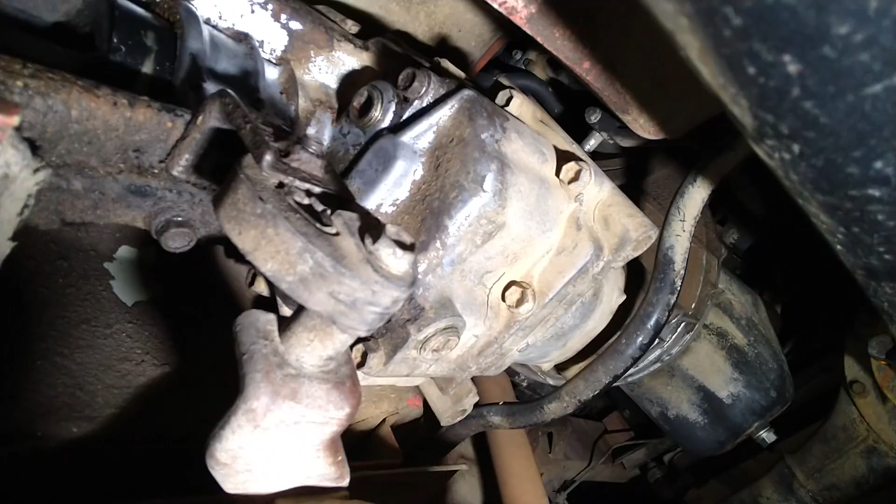But first, let's try to crack open the fill plug, as always. Our transmission has a level plug here, the fill plug here, and the drain plug here. On this transmission they're all conical. Luckily, we have 3 of those extra, which means we won't have enough for the transfer case, but we'll order some. We are going to totally ignore this one, because we are going to overfill it a bit and see what happens.

But first, let's try cracking this open and this open. I have a feeling this is going to be the hard one, because I see oil here seeping out, so maybe the threads are okay, maybe. And I think this one is glued on with something green.

Last time we just used a 3/8 extension to turn the plugs. In the meantime, I actually got a 10mm adapter. It fits a little bit nicer. So let's try to crack those open. We're not going to film that because I cannot hold the camera and film it at the same time, so you'll have to trust me if I do it or not.

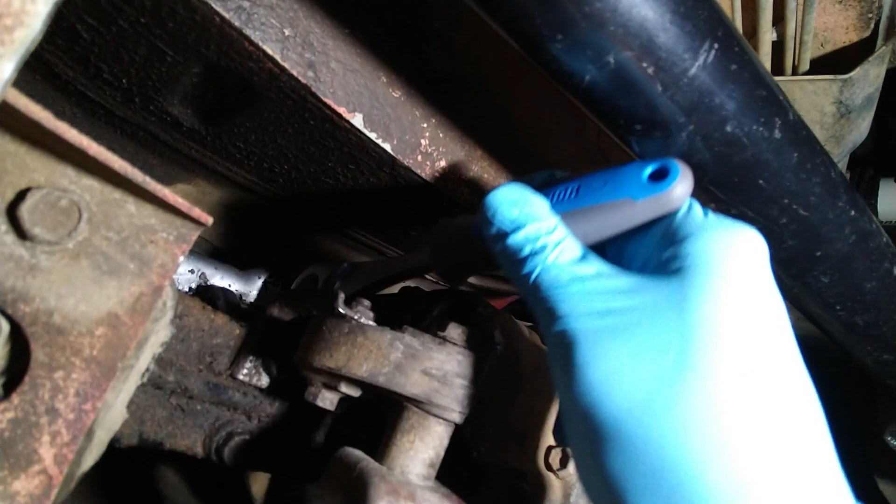Okay, so the fill plug is undone - I mean, it's not out, it's just loosened. I'm going to loosen it more. Oh, this is really small. You need to have a real nice ratchet to do this. See how much? 2 clicks. I have 2 clicks of room here. And this one is also coming out nicely.

Now we are going to disassemble the shifter in the car and see how that looks like, and then we are going to drain it. We actually do not need to take this plug out because we are going to fill it from the inside of the car, but we'll see how it goes. The bucket is fairly clean because we want to examine the oil when we get it. And did I find another hole in the car? Maybe. Okay, so fairly clean bucket.

Let's see - I think you can get this on camera actually. And try not to get it too much on the catalytic converter because it is going to smoke a lot. Ready? Ready?

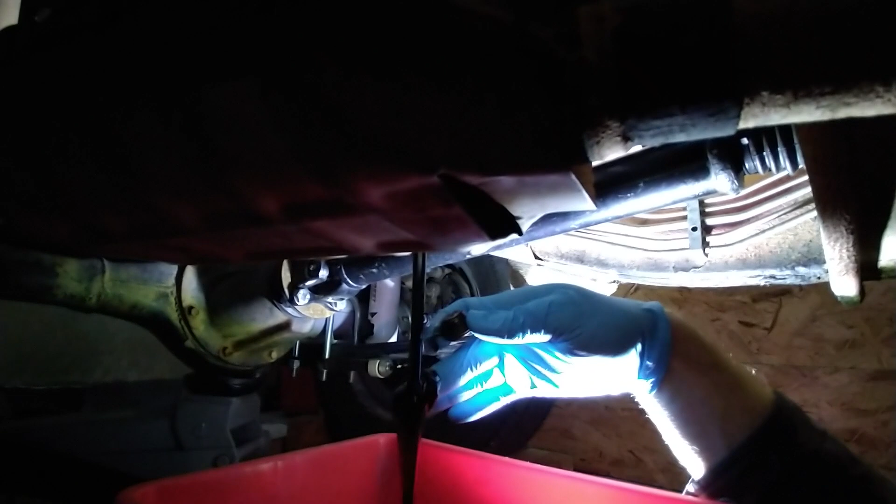Wow, oh, that is very black. Greenish. What? Greenish. We have some metal shavings on this, I think. Okay, let that drain. Oh, it stinks. Yeah, it is gear oil, you forgot about that.

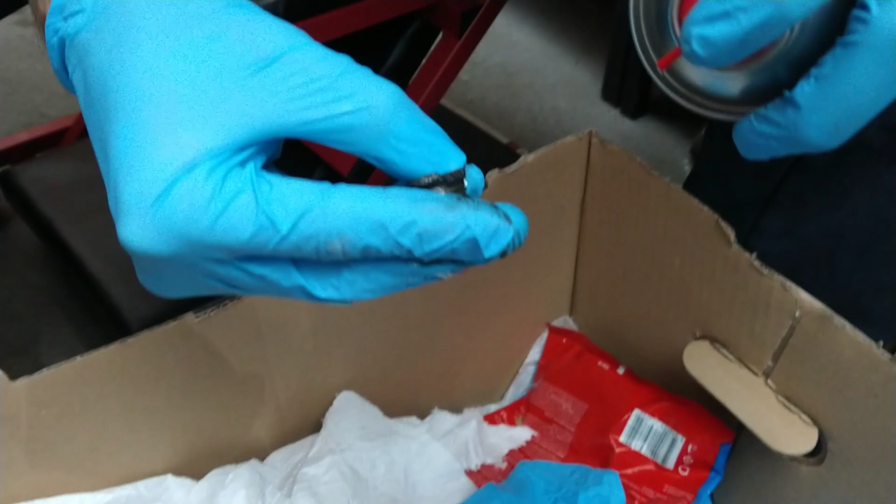Let's let that drain and let's examine the plug. It seems that this plug has a magnet. And there is - really? Yeah, and there's some sludge here. It's magnetic sludge and some metal shavings.

Let's see. Do you see the silver parts? Wait, do you see them? Be still. There's a big chunk here. Where? On the top of my finger. Here? Oh, yeah. Do you see them? Yeah. So there are some metal shavings on it. Metal shavings, yeah. And there is some - I don't know if it's sludge or just - they're quite small, and I have no idea how much is too much for this transmission. Look at that.

Interesting - yeah, but there are no humongous parts, just small metal shavings. You're saying this is normal? A bit is normal. I don't know when this was changed - it may have been many tens of thousands of kilometers. That would explain the amount here. So we're not going to bash our heads about it, we're just going to do a light service and see when it blows up.

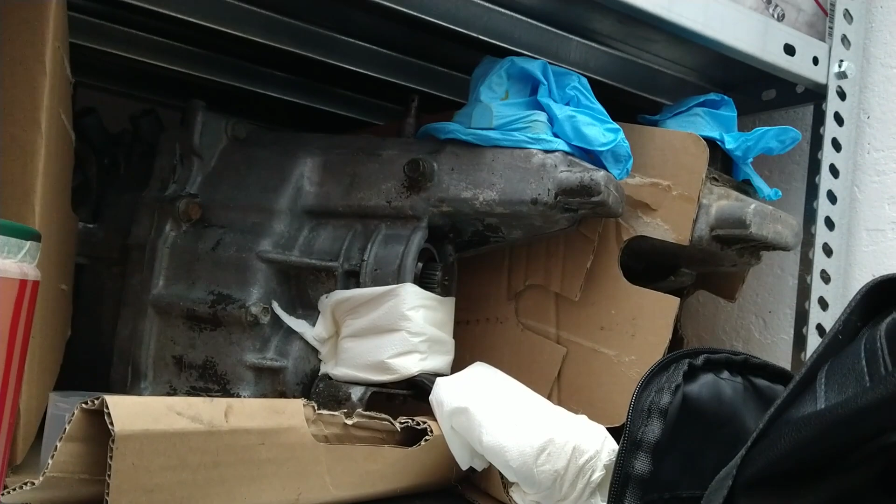Because we have 1, 2, and 4 more spares.

Yeah, there's a lot of metal shavings here now. How will we clean it? No, we're just going to put a new plug in.

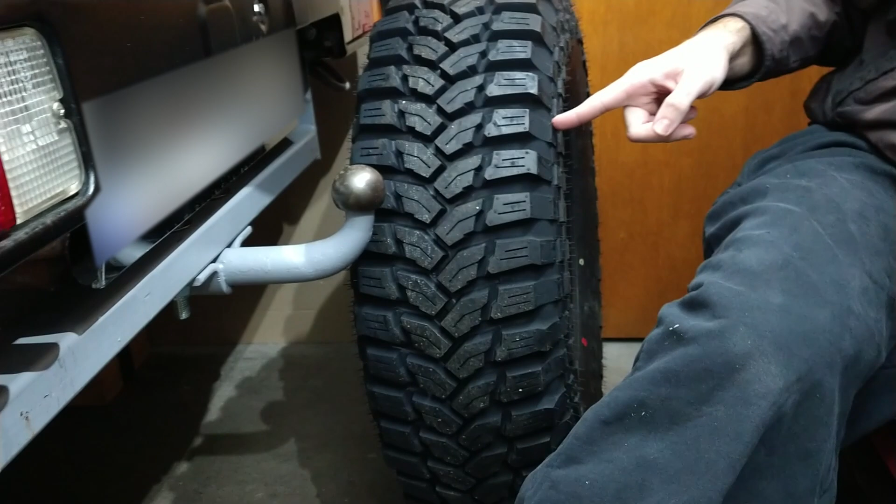You can wipe this off with a rag. I'm just trying to expose them so you can see them on camera better. I think one of the bearings inside is going, or it's already gone, so we need to build a transmission and put it in. But since we made some ill-advised decisions, we're just going to service this one and then concentrate on building a crawler transfer case and start from there.

Let's take the boot out of the car and take the shifter out to see how that looks. I would say turn off the dome light, but it's so weak, and I need somewhere to put this so you can see what I'm doing. Yeah, we have a shadow there, but you will forgive us.

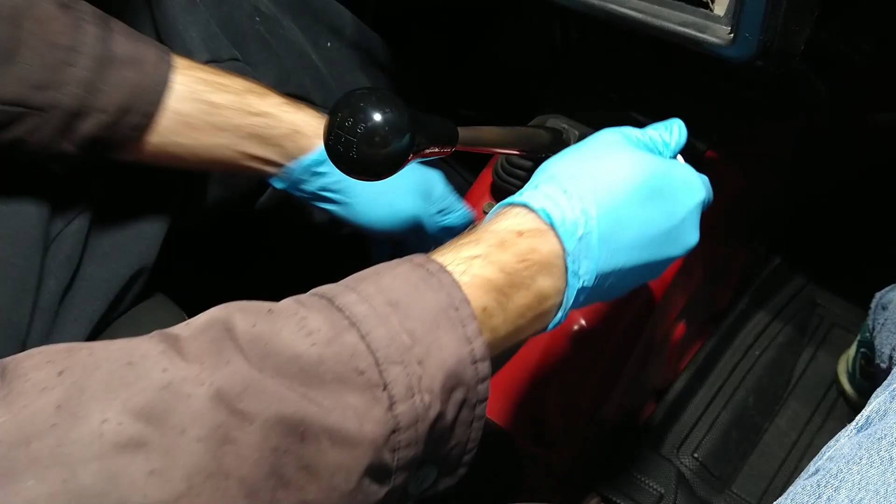Let's see if we have to. Maybe we should do this properly. I've never seen this open before. So we'll take the shift knob off.

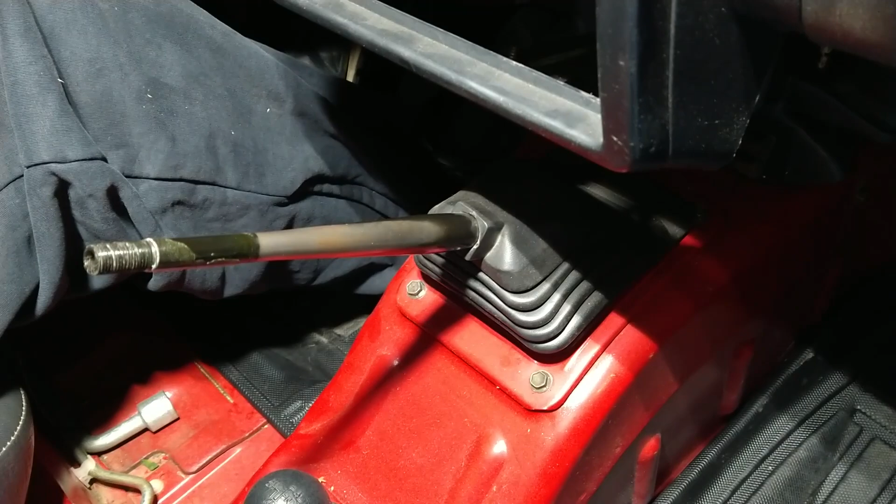Just like that, we have four 10mm screws that hold the boot down.

I never took one of these apart, so this is probably going to be quite nasty from the other side. Nasty, yeah, greasy.

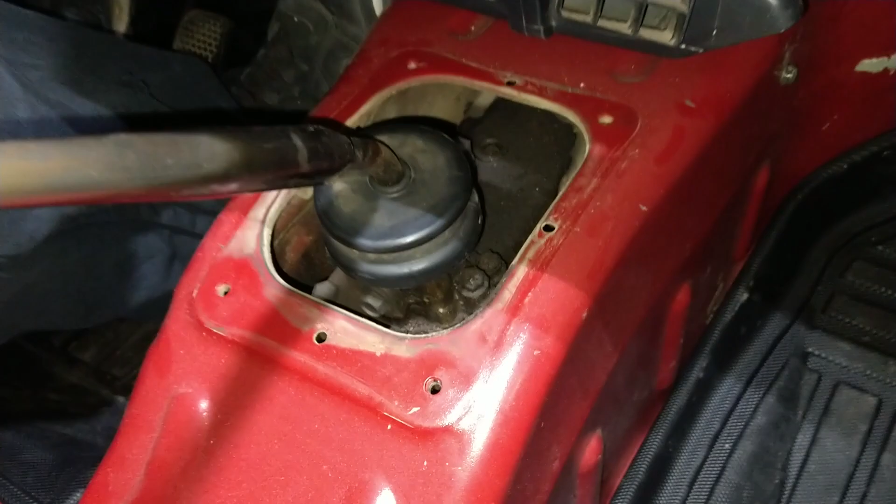Can I pull this now? Oh, it goes somewhat easily. It's not that greasy. Just dusty. Dusty is okay, you want dusty. You do not want greasy.

Let's see, oh, this fell off. This is another boot, yes, that fell off. There is some play in this.

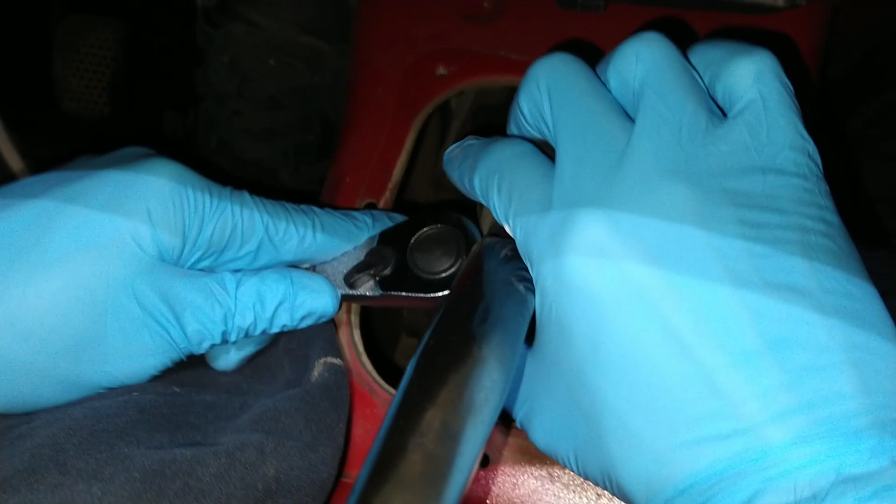Before we take the shifter out, make sure that it is in neutral, so you don't have a problem putting it back in. Because if it's not in neutral, you probably need to push a flathead screwdriver in and try to get the forks to the neutral position.

Okay, this boot is also not looking that bad, but it was not installed properly, and now we're starting to get some grease on everything.

Do you think we will feel the difference when driving, when we change the oil? I think we are. And now this should just pop out like that. Oh, this pin is not that bad.

What is this for? See this slot here? This slot meshes up with this pin here, and that is what keeps your shifter from rotating.

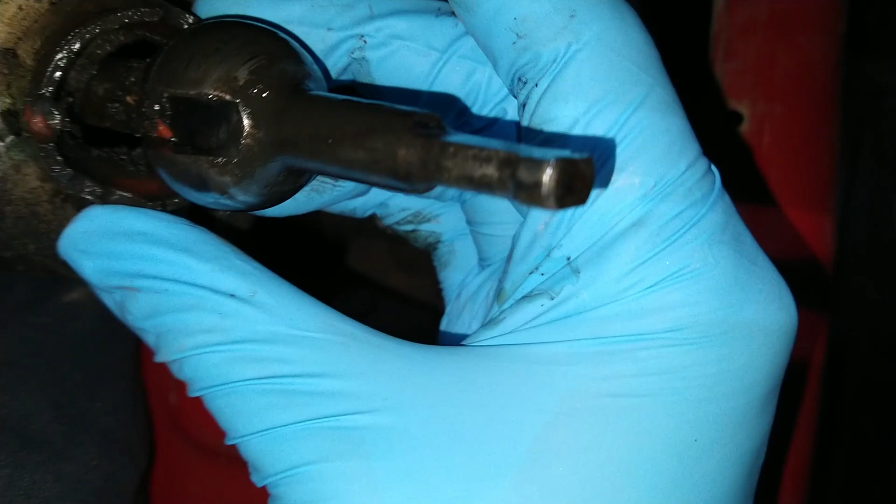The springs are springy. We are going to clean all of this out. It has seen better days, this bushing.

Will we just dip it in something? We are going to exchange it, yes. So let's get out of the car and clean all the parts before we pour oil from here.

Just let me see inside. Oh, I can see the gasket material. Yeah, it's a kind of silicone. Maybe this was off at some point of its life.

But yeah, this pin breaks here, and then you have a sloppy shifter. And you need to take out this bolt. This is one bolt, and there are two sizes, M8 and M10.

Depending on the year. Yes, I think after some year they put a bigger bolt because they're prone to breaking.

And when you're doing this, get on the light. You inspect this part, see how these walls are nice and parallel. If they're oval, you will also get a sloppy shifter, and at that point you need to exchange the whole shifter.

But most of the time this bolt breaks, and then you get a sloppy shifter. All of our other Samurais have a sloppy shifter, and it's because of that it is broken.

Is this a crack here? This has seen better days, this has split. What about that? We have a new one.

Let's locate it, let's clean everything, and let's start assembling everything back together.

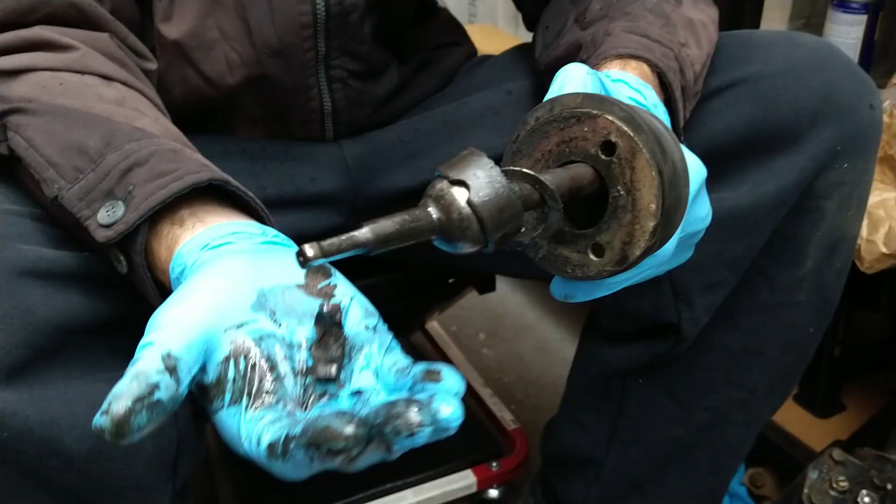And just like that, we have removed the bushing. Oh, great. So this is all not that bad.

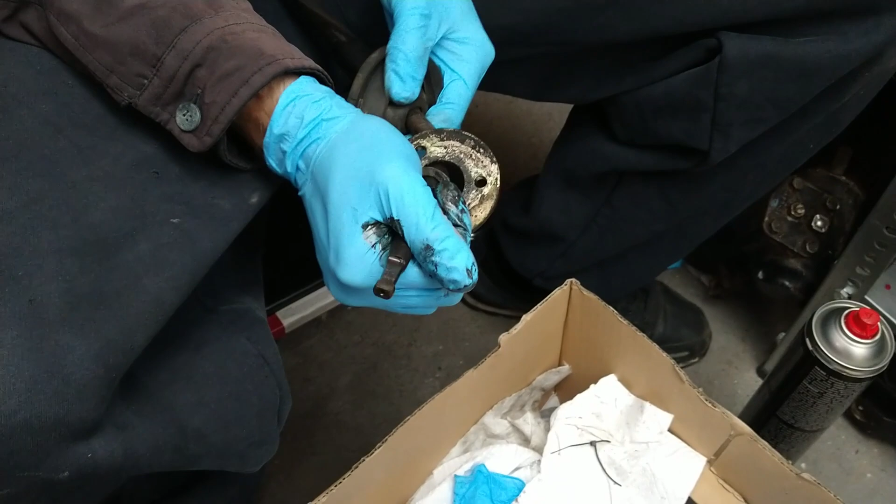I don't know from which side you need to put this boot on, but let's try to invert it so it's out of the way. Yeah, that will do. Oh, parts are falling off. Let's see now.

We have a bushing here that is brand new, but it needs to go from this side, so this boot needs to come off. We have a new boot and a new plate.

Yeah, we should open this. The new metal cover, this is that part. This is the new bushing.

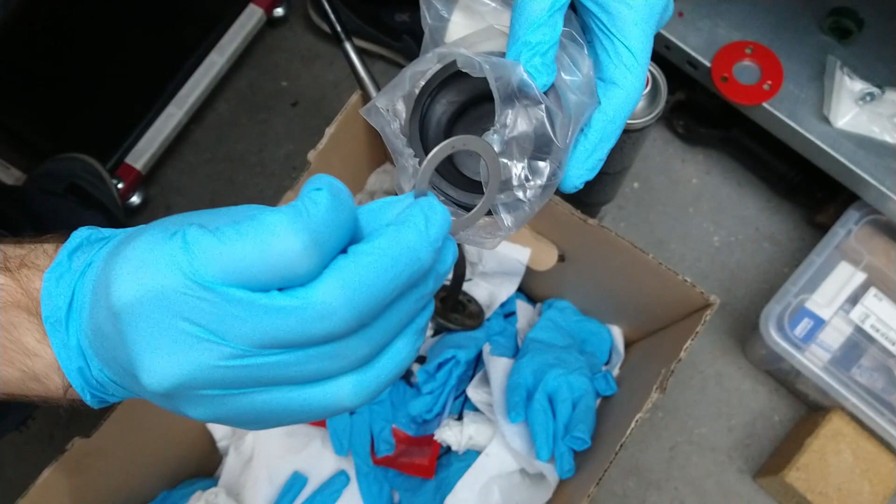That just fell apart. It's not really round, but maybe it's an optical illusion. Yeah, it's not round. And a new spring for that. It's not a spring, it's straight. This washer should be a spring washer, and a new boot.

This is a new boot. Looks a bit different. It is the same thing. Okay, so I need to remove this one. Yes.

Use silicone spray on this, but the silicone spray is at the workshop. Oh come on, how do you get it off? I want something soapy. Actually, we do have something soapy. There we go.

Get one side on and then rotate it. There we go. Assembly should be much easier. So we're going to reuse that part.

Oh, you know why it looked different? This one is stretched a bit. And see this washer, how it's springy? Maybe it's just squeezed.

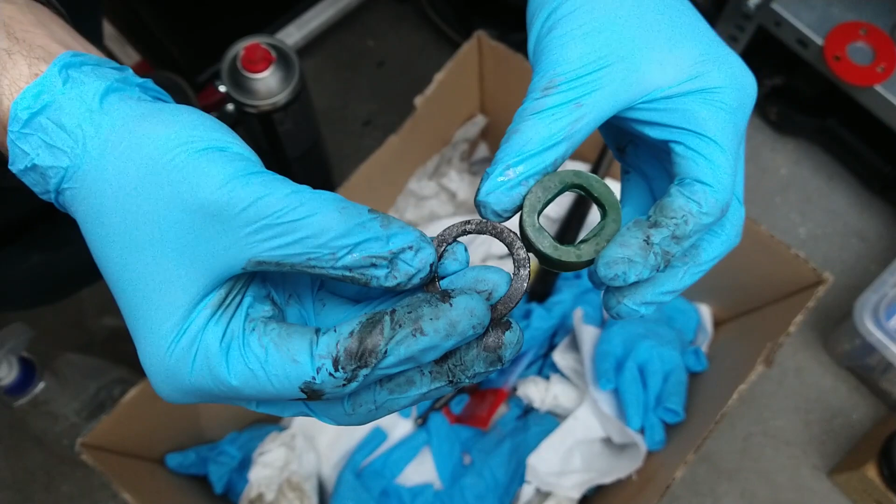No, this is how it's supposed to look. But will this other one get this shape? No, it needs to be like this before installation. So when you tighten it, it pushes on the bushing. That's why it is this shape. I'm not sure why they do not include one in the kit.

Can we shape it like that? Yeah, but I don't know if this is made from spring steel. That is the question.

So we are going to use the original one after we clean everything. We're not going to exchange the shift ball because that one is intact and I cannot feel any wear on it.

So we're going to reuse this part. Oh, look how shiny. Yeah, imagine if you give some love to your parts, they work better most of the time.

Oh, we need to get some grease. We need to grease up the top of the transmission after we put oil in. It says to put 1.3 liters in, but if you put a little bit more, I think nothing bad is going to happen.

And we can operate it for extended periods on extreme angles, as we plan to do. And the gear whine should be a little bit smaller.

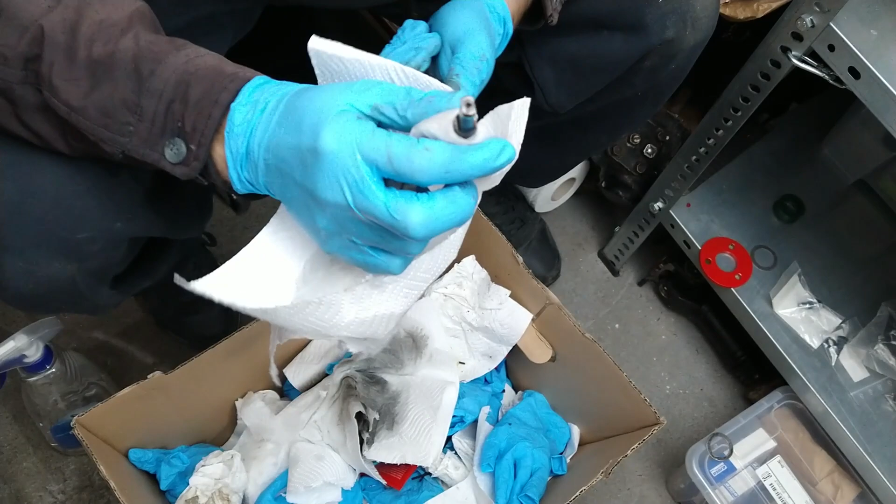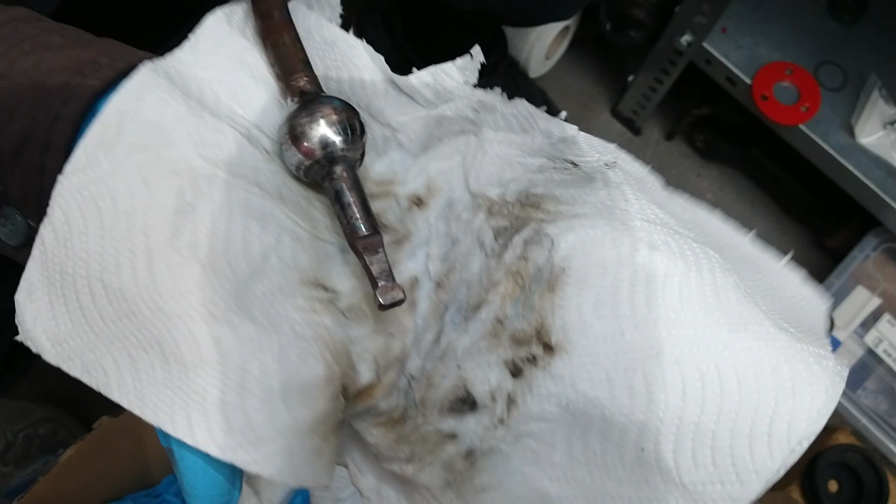Let's inspect this now. You see a wear patch here? It's not that deep, it's just shiny. There's a wear here. Everything looks very straight, nothing's broken, nothing's worn too much. It had sufficient lubrication, apparently.

So let's just clean it all up. This is interesting, look at this design. Let's talk about the design. This is the middle point.

But this thing I think is hollow and it's made from two parts. And then this part is slipped on and it's pressed. So I think this part goes to about here and then a hollow shaft. Is it hollow? Let's test our theory. Yeah, it's definitely hollow.

Okay, then the hollow bar is pressed on to keep it in place.

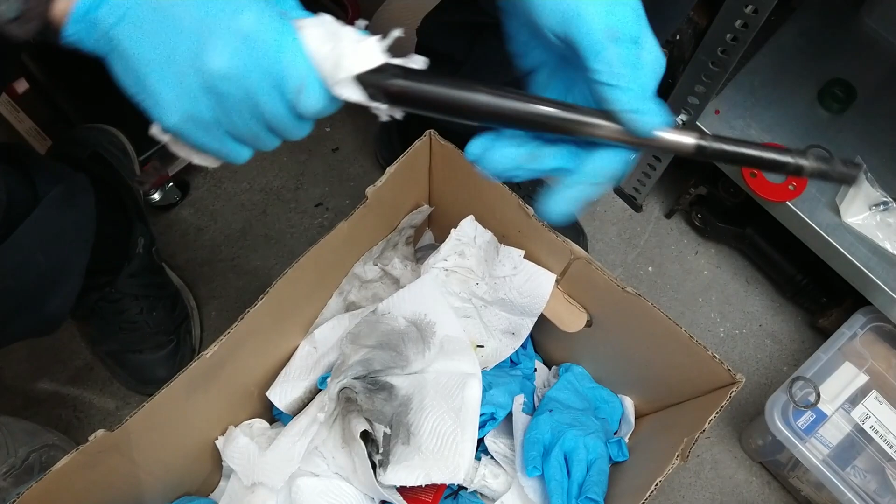Very interesting design. Why is it in a different color? It's faded, it looks faded. So the color is still a bit here. Then we have, yeah, it is faded from the holding on to it.

So this is anodized and this is paint here. And the paint is chipping off. And the anodization, this is literally years of wear from somebody holding their hand like this. Yes, and grabbing it like here. Yeah, but let's clean everything.

We need to get some grease. Let me just think what grease should we put in there. Green grease? No, I was thinking that black one. Ooh, the shiny one. Yeah, the shiny one, the one that you like the most. But before that, let's pronounce this clean.

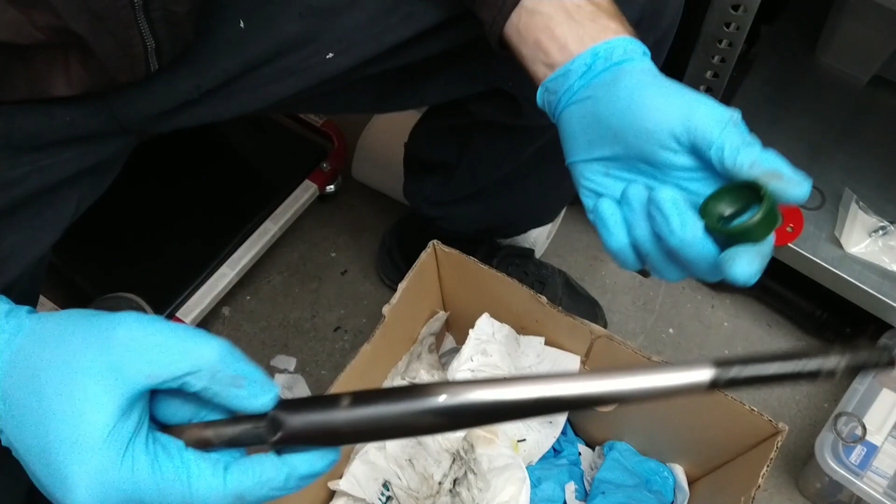And now, the new bushing? Seriously, I need to press it on. How do you put it on? What material is this, plastic? Yeah, this is some kind of plastic.

But do you really need to squeeze it all the way here? No way, this is gonna break again. It's probably gonna break. I cannot put it here. No, I think you are supposed to... break it. Yeah, let's try a little bit of lubrication.

Oh, it doesn't like that. Oh, you did it. Yes, you see?

Okay, so the spring washer, that goes on top. Where is our plate? That one, we should not throw that in the garbage.

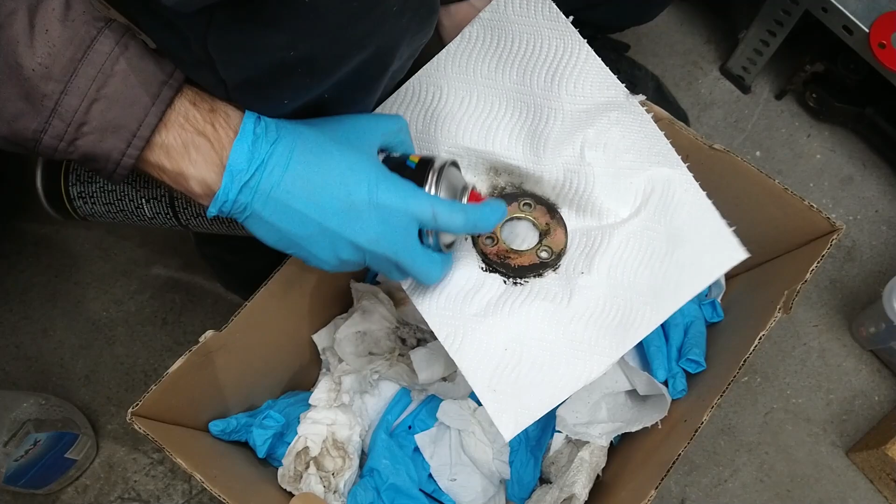We are going to use the original. What about the new one? We are just going to put it in the pile of new parts. Look how nice and red it is. Yeah, but this one is anodized, so it didn't rust. See, that one is probably just painted. Yeah, but look how nice it is. I know it's nice, but this one is the original one.

And we can exchange the bolts, those are M6 by something bolts. So I need to go get the grease, some bolts and some washers.

Do we have oil here? Yes, this is full. 75W80, good enough. This is going in.

Just like that. That one goes here, the boot. We're going to use the original boot, yes, original again. So we have some spare parts.

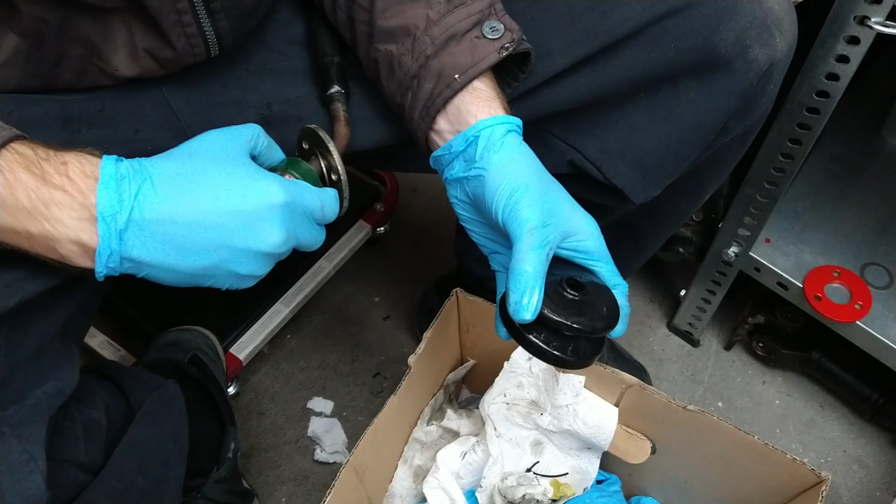We just needed this green part. And today I learned that you can get it from brass. Oh really? Which would have been nice if I knew that. And you can get just this part? Yeah, you can get just that part.

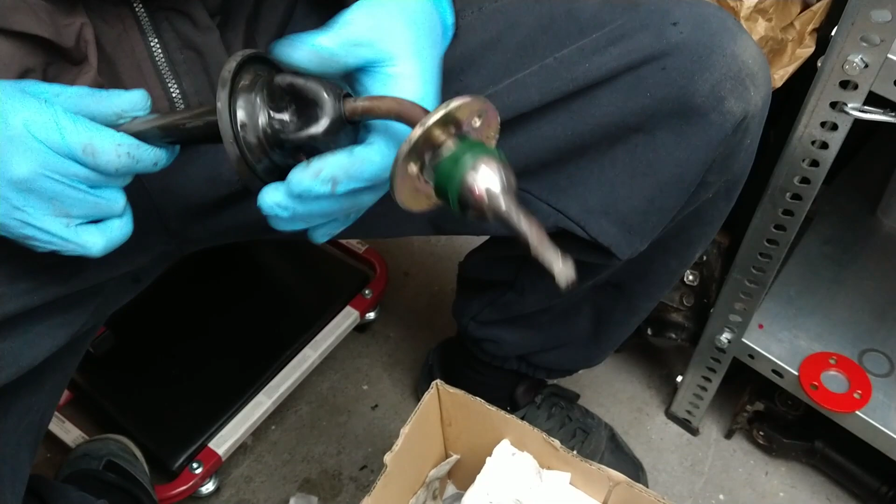The boot is on. Let's invert it so it's out of the way. Just like that. Grease, put a lot of grease, and these are the bolts that we were talking about.

So this is an M8 and this is an M10 one. I think this one uses the newer style, like this. Oh, you got both. Yes, I got both because I did not know which one to get, and they're quite cheap, so I got both.

And we have a spare boot in the end, a spare pressure plate, let's call it like that. What about the big boot? We have a new one, but since that one is not cracked and it's just dusty, we're just going to use the old boot. I'll clean it a bit.

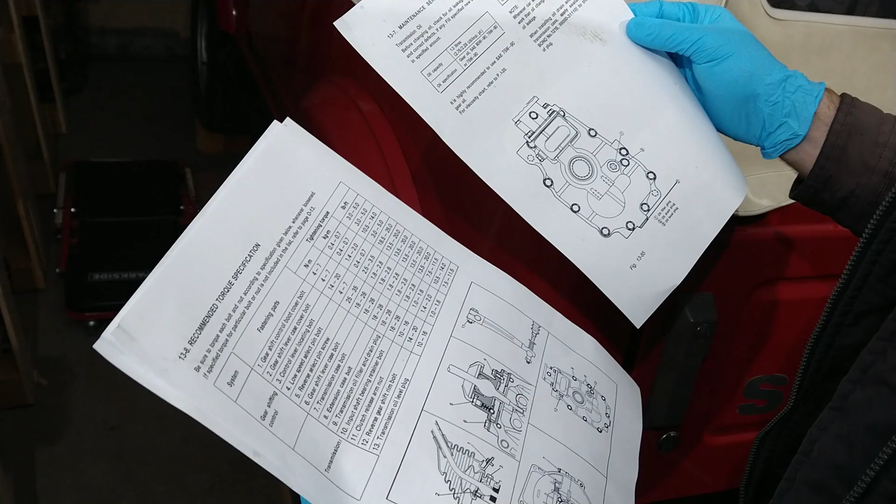10 to 16 Newton meters. Transmission, 10 to 16 Newton meters. We're not going to exchange the level plug. We're just going to tighten it back on, and we're going to put a new drain plug and see if it leaks. If it leaks, we'll put some Teflon on it or something like that, and we'll do a new transmission oil change ahead of schedule.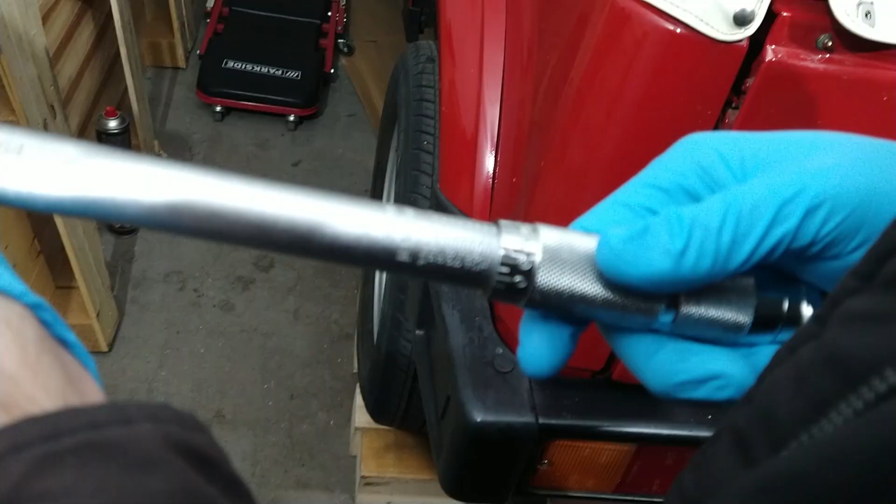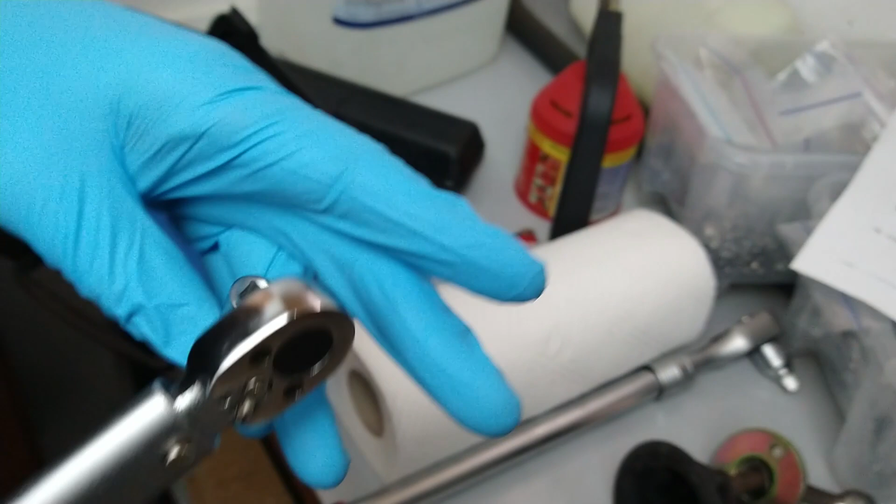Oh, looks the same. Look how cute it is! But it's smaller. And I have this, the cutest adapter. Oh, it has it even, this is small. So the minimum here is 2, and maximum 24.

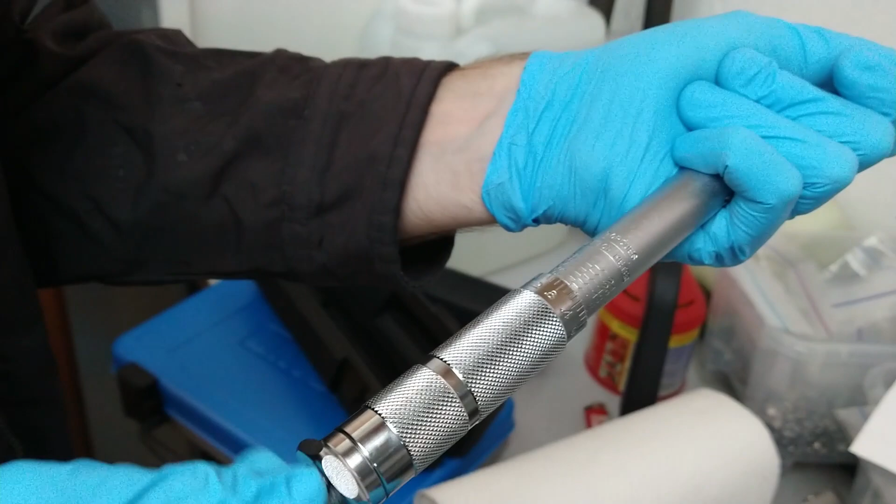And on the other one? I don't know. Oh, that is 5 to 80, I think, something like that. Okay, so this is 4. Oh, I have a long way to go. This is 10, let's say 12, or... Yeah, 12. It says 10 to 16. Let's put it on 12.

Let's tighten the smallest knob. Okay, now first of all, tighten the drain plug back up. It's still dripping down here.

Give me an extension. Where is it? I have no idea. Great. Is it on the table? No. Are you sure? Found it.

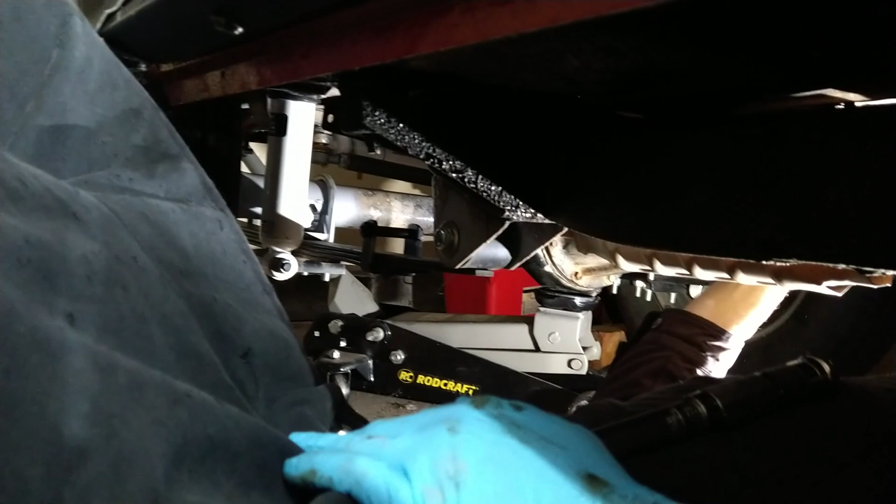This new plug also has a magnet. And it has some Loctite or something on it already. Yeah, it has some thread locker on it.

Oh no way. We are going to 16. Oh really? Yeah, the thread locker is messing with our engagement. Where is 16? Here it is.

Oh, this sticks out quite a bit more than the old one.

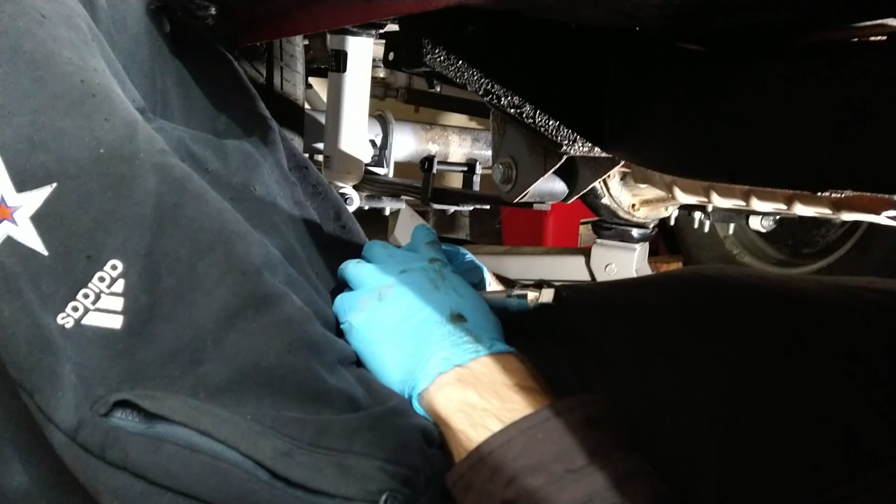You know what? Should we exchange the level plug also? Don't know what that is. It's the same thing. Let's change it, we're doing a service.

Give me the normal ratchet, and give me the plug with the black dot on it. They're in separate bags. What are you talking about? Ah, these. Okay, what were you looking at? I think some other plugs. Sorry, give me the ratchet please. I thought this is something different.

In the car. Yes. Here we go. Do we have everything now?

If you look at this on the light, can you see something yellow on it? Yes, that is some kind of thread locker. So you do not need to put Teflon or thread locker with these kinds of plugs because it's not bare.

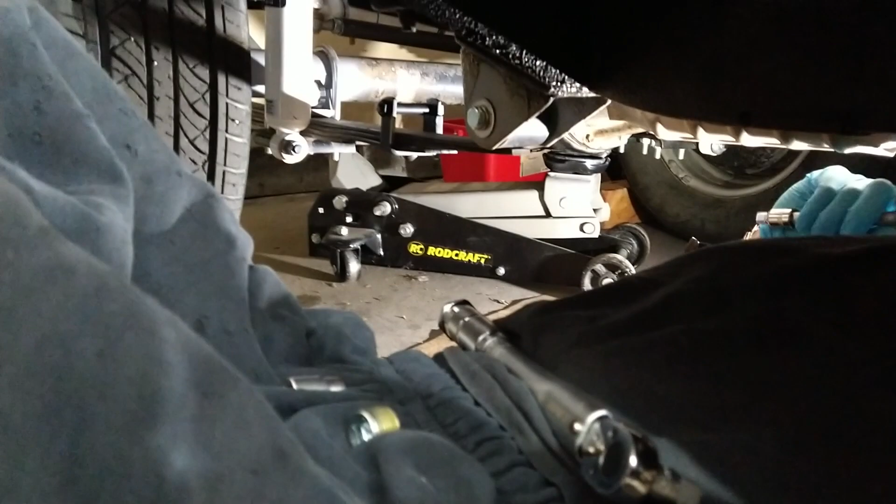Great, so I'm going to remove the fill plug, the original fill plug, level plug, fill plug. No, this is a fill plug. Yeah, not the same on this car.

Where is this plug going? I will show it on camera. This is the plug you normally fill the transmission through.

And one click at a time.

We're getting there. Okay.

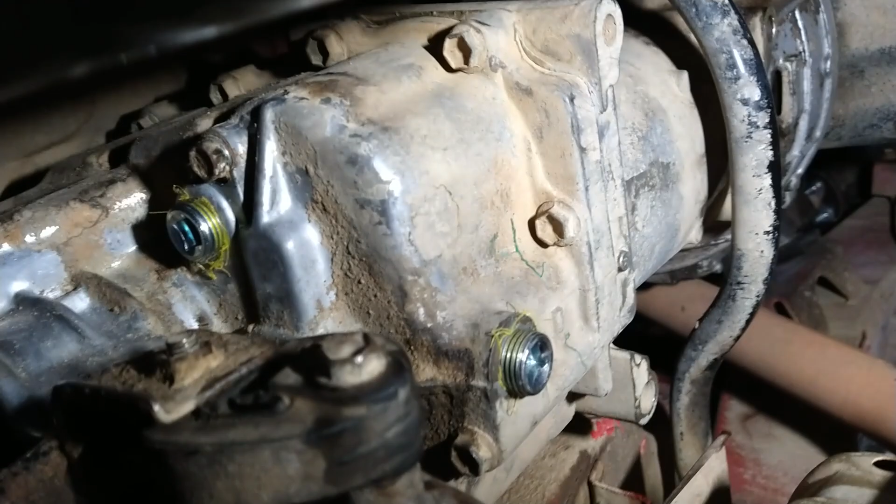Oh, it's not on the wide angle. The drain plug is installed, the fill plug is installed, and the yellow spaghetti you see is the thread locker that was on the plugs. When it threads in, the casing just eats at it. Both are now at 16 Newton meters, which is top of the specification. You would normally fill the transmission through this small one out, that's the level plug, through this one. Fill and level plug are not the same on this transmission.

But since the shifter is out, we're going to fill it through the opening in the cabin. So now let's go do that.

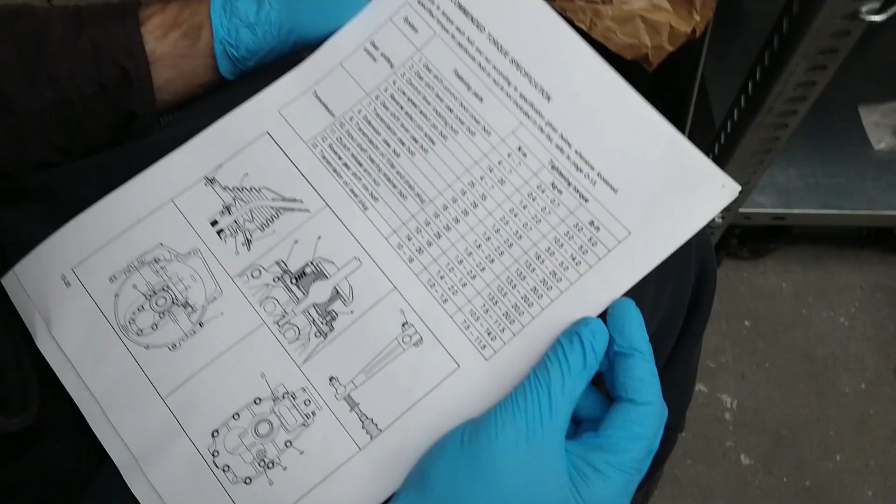This is a table of all the tightening specifications for all the major bolts. We're interested in number 2, gear shift lever case cover bolt, 4 to 7 Newton meters. And those in the cabin are number 1, gear shift control boot cover bolt, 4 to 7.

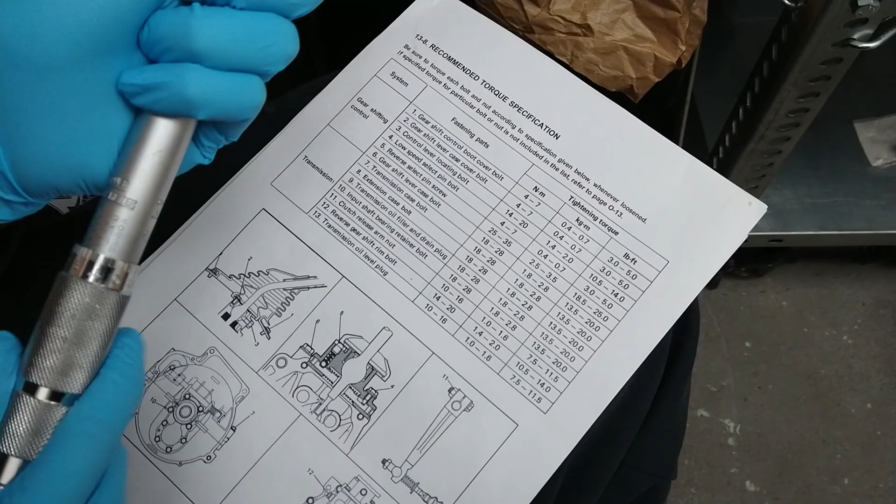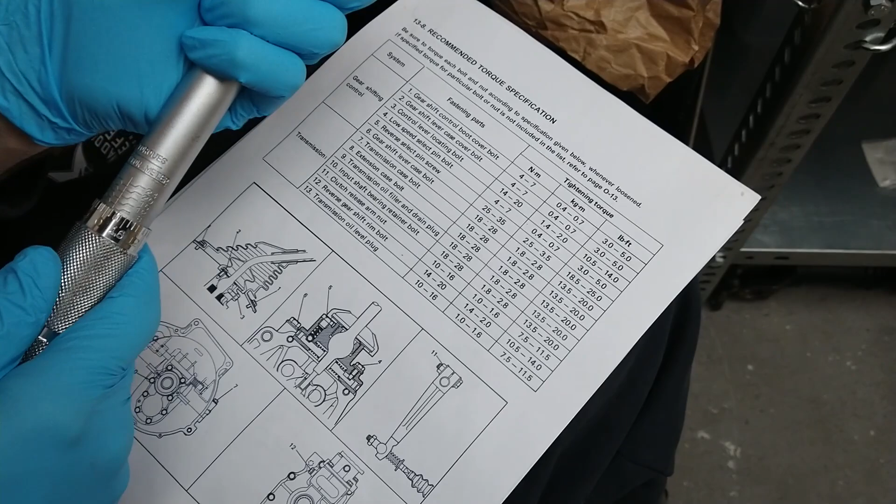We're just going to put this at, I don't know, 6. We're not going to over tighten, especially these ones, because you're going into aluminum. So beware of that, those are small bolts, small tightening torques, 6. There we go.

And now we need to find new bolts for this. No, first, let's fill the gearbox. The gearbox usually takes

1.3 liters, but we said we're gonna put a little bit more. That takes it up to number 13, which is transmission oil level plug, when the car is level. But we're going to put 2 liters in. Yes, to fill it more. Normally it's up to here, but it will probably be up to here.

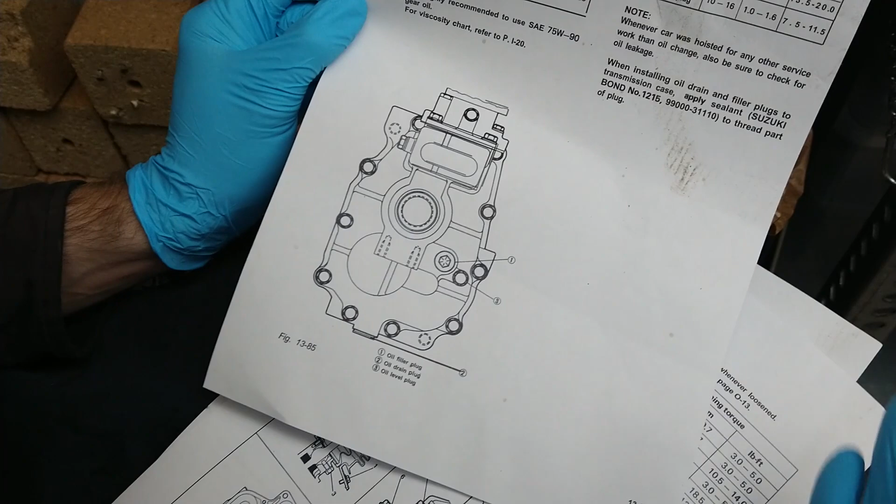So all the gears are going to be in oil all the time. Is that a bad idea? I don't know. If we see oil leaking from the clutch or the rear main seal, we'll take some out and exchange the seal. So it can leak somewhere, actually. Yes, of course. If this was an engine, do not overfill it. Yeah, this is a transmission, it has a breather somewhere. You cannot see it here, but it has a breather.

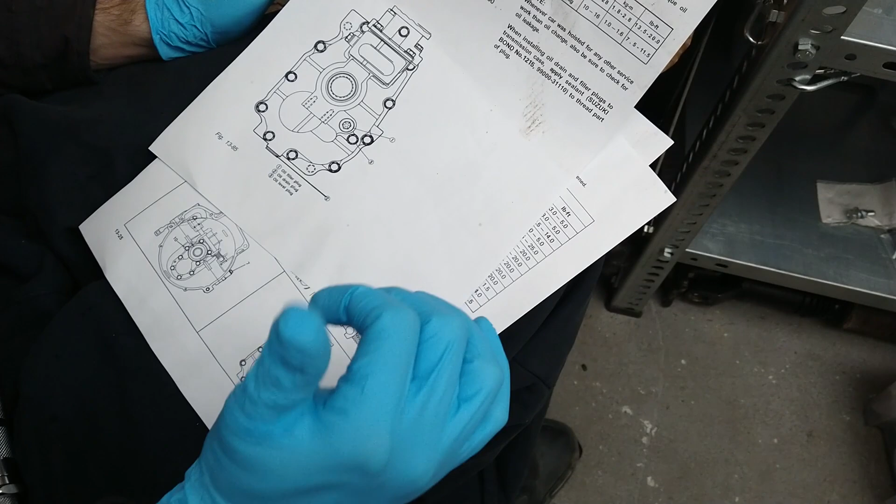I read somewhere that if you have a whining 5th gear, you should put a little bit more oil. I don't think our transmission is whining as much as it is grinding, and our rear differential is whining. But since this is a 1 liter package, we'll just put 2 liters. And if we start to overfill from the top, then we will reassess our situation and think about the choices we made in our lives.

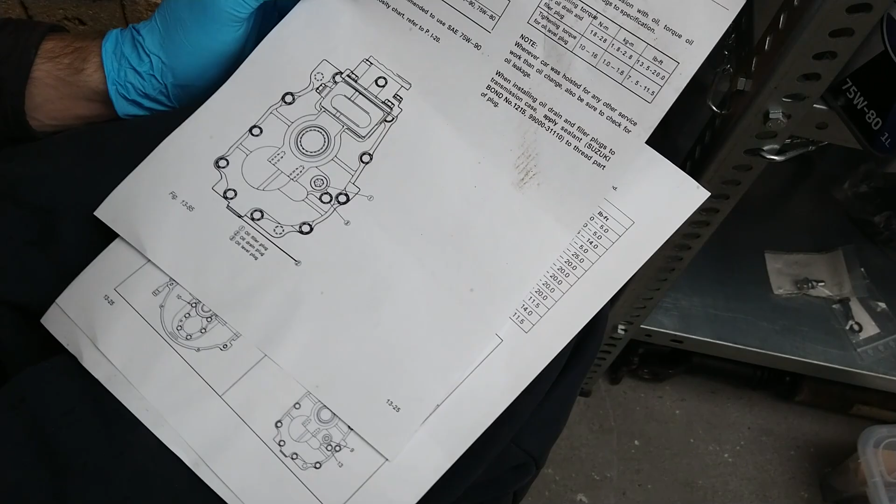First, fill it up with oil, then grease everything up, put the shifter back in with new bolts.

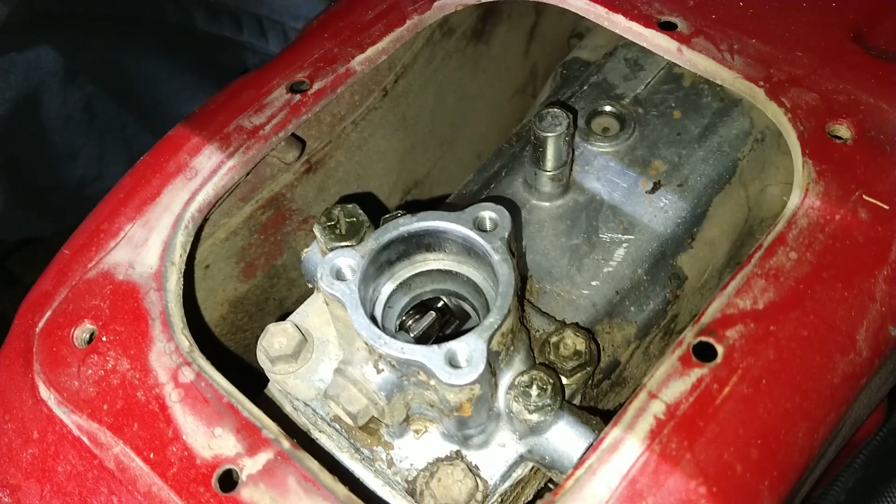We cleaned this up a bit and the top of the transmission. Now let's do the stupidest thing in the car. Wait. Let's try to be a little bit less stupid.

Get paper towels and put them everywhere. Let's try not to get dirt inside. Okay, nice.

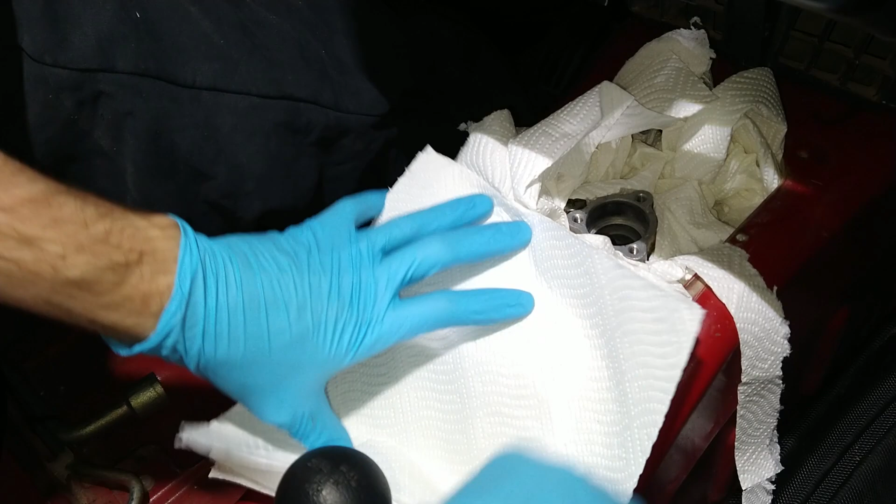We need more paper towels here. Why? We'll see now.

Oh, I hate doing this in the car. Yeah, put it on yourself. So we can put this here. Okay, and now.

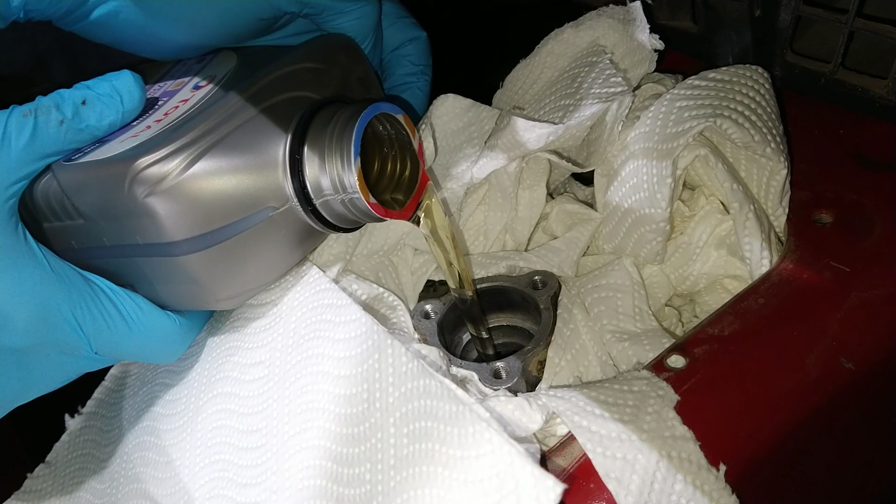Going nice. As I said, 1.3 liters, but we're going to put 2 and see what happens. So stay tuned, this is one, to see if our transmission explodes.

And of course we forgot to get the key for the car so we can start it. Oh no, really? Yeah, you know, it always happens. I wanted to try it out. Me too.

Okay, second liter going in.

Let's get this out of the car and let's get the grease and all the stuff that comes with the grease. Fun.

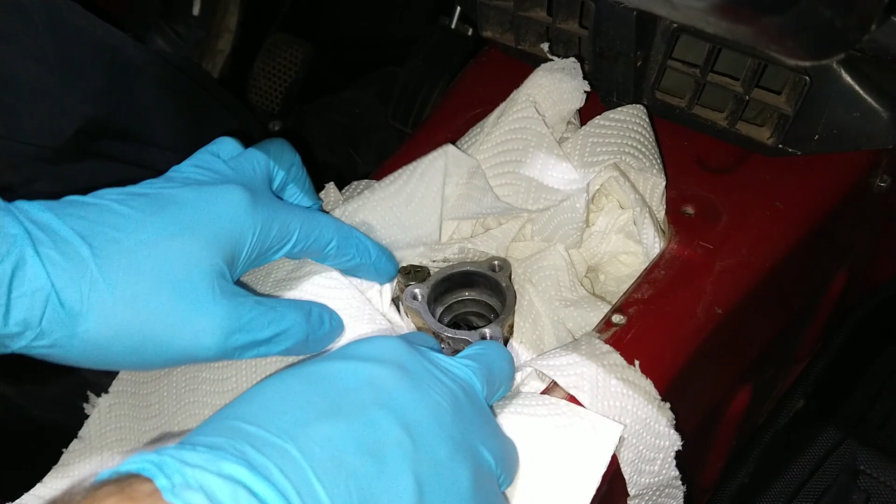That went quite nice, but we'll leave this here because of the grease. The bolts are not too long. I have grease. Whee.

How much? I don't know. About that much. Let me get the shifter assembly.

Did it get all the way down to the... yeah. Okay.

These are gonna be new bolts. Oh, nice, I knew that you would like the shiny one.

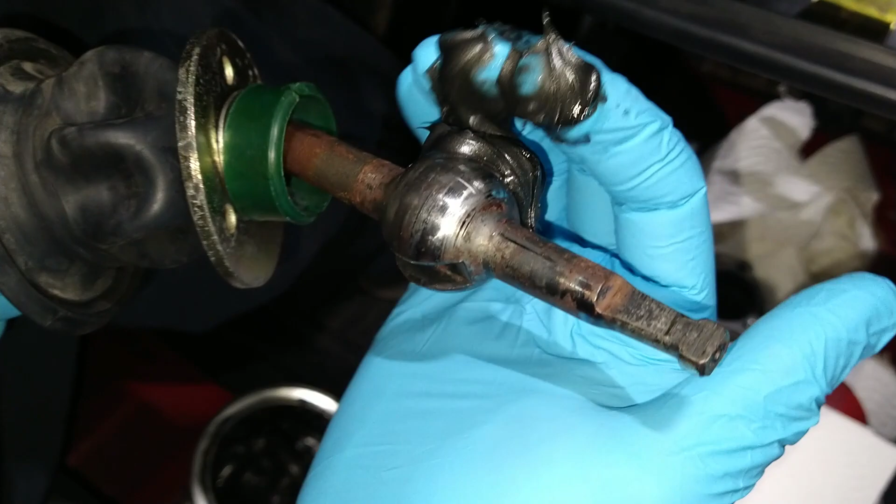Yeah, something like that, and this bowl. Yeah, bulge. I like this shiny grease.

Will this grease get into the oil? Yeah, mm-hmm, it will, probably. Do we care? No. Yes, that is the correct question. Yes, we do care. No, we don't care. Ah, okay, I was correct. Okay, yeah, you were correct. Yeah, something like that.

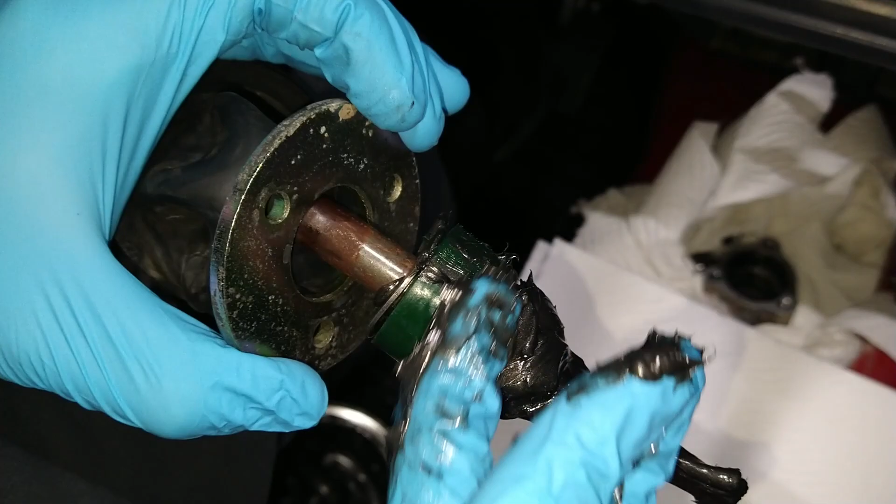Let's put more. Is your light good enough? Perfect, you have 7 lights now. Yeah, it's perfect to see all the dust and scratches, but yeah.

Hey, this part is not scratched, this one is new. You know how few Samurais I've seen that have this? Yeah, they all lost it, or if they didn't lose it, they screwed it, have a screw.

Yeah, okay. So since this is in neutral, this should just pop right in, right? Okay.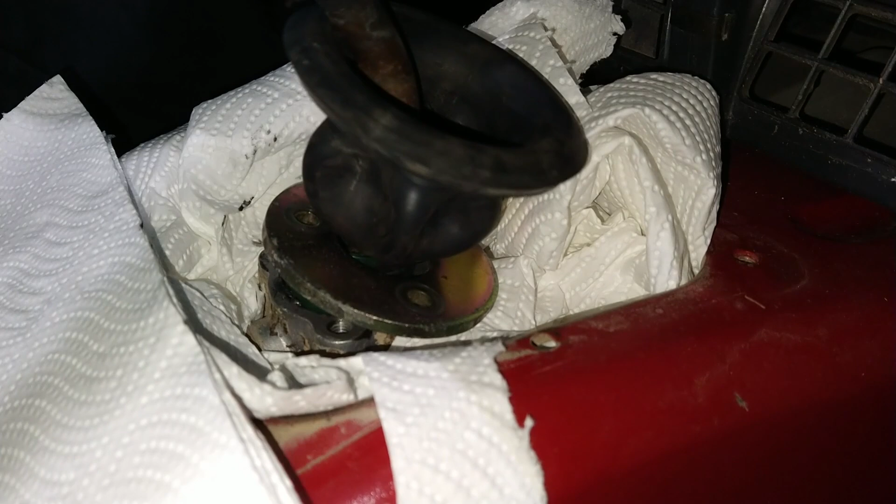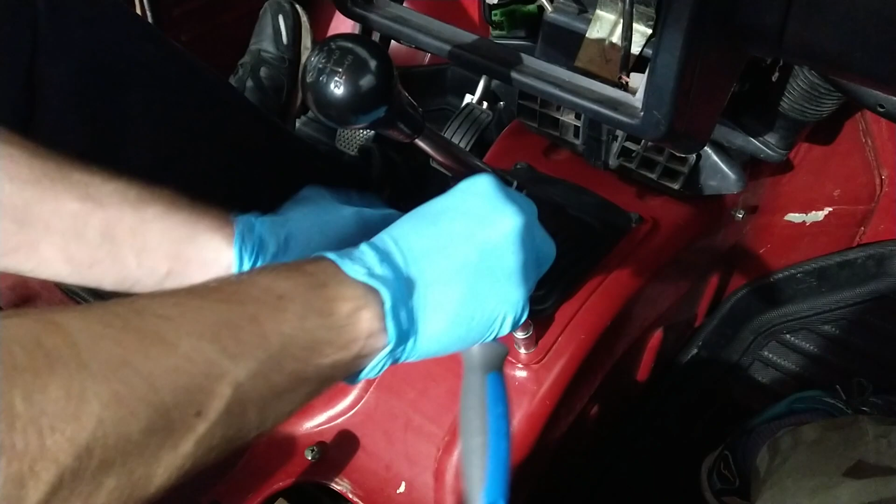We have a small addendum, this will be in the video. We forgot to show something, so to be complete, since the car is still partially mobile - you can see that by the giant hole in the floor. I mean, it is mobile, but in a certain way.

So you're opening this box again? We're going all the way down. Oh no - to see if the bushing has seated correctly, because we did not pay attention while we were doing it.

You are now in our unfinished video universe where everything is in the cloud, mixed together. It's not in the cloud, we don't use the cloud. Okay, I meant metaphysically - we do not like the cloud.

Okay, we need to take this off. Take this thing off. We have a light on that phone, right? Oh yeah.

So before you plop this in, if you were watching carefully, you notice that the bushing has two grooves. See this groove here? Do you see it on camera? And there's another on this side, and that needs to go over the pin. So it was correctly - we got lucky. I knew it, it was fine. Oh, we needed to check - I think it wouldn't fit inside otherwise. Actually, you're probably correct, it's not in the groove. Oh, I'm really making a mess out of this. But yeah, you need to watch for those two grooves.

And now we'll return to a regular video. Yeah, back to the past. Back to the past us.

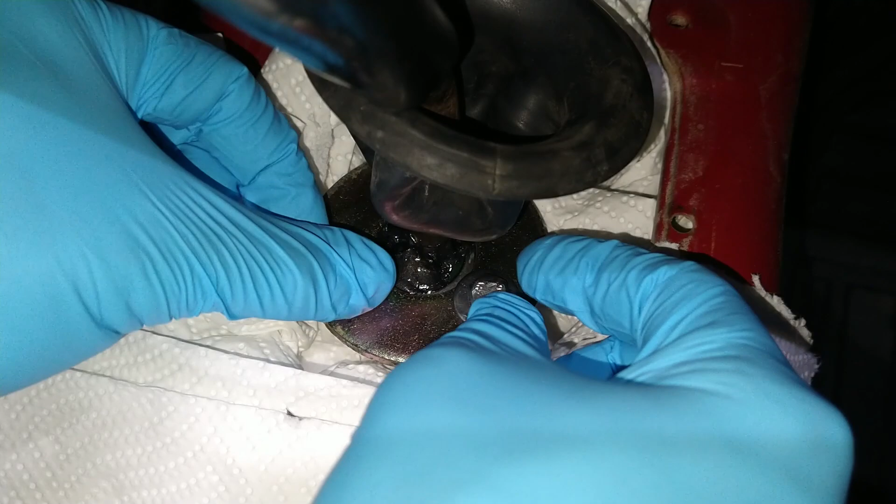The bolts - I forgot my torque wrench. One bolt. The second bolt, two at a time. Wiggle everything around, this one I cannot see. Yeah, you're there. That is now what, third gear? Straight back, it can - no, fourth. Sorry. And I got grease on everything here.

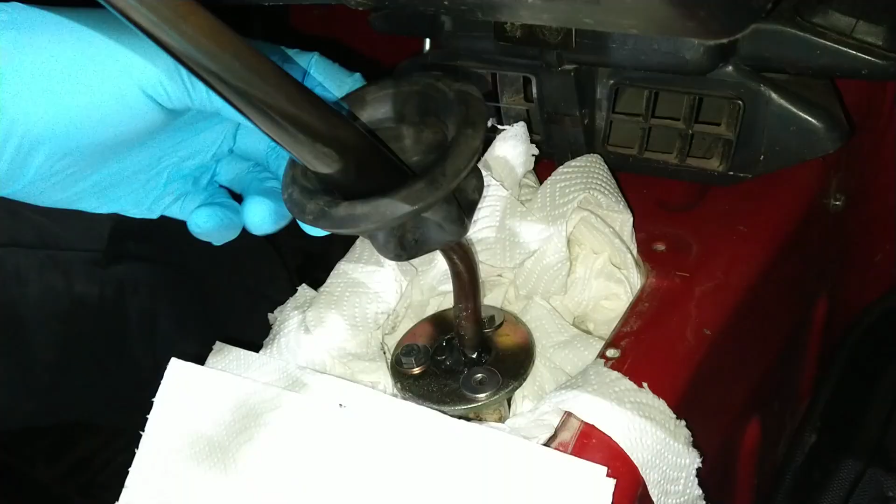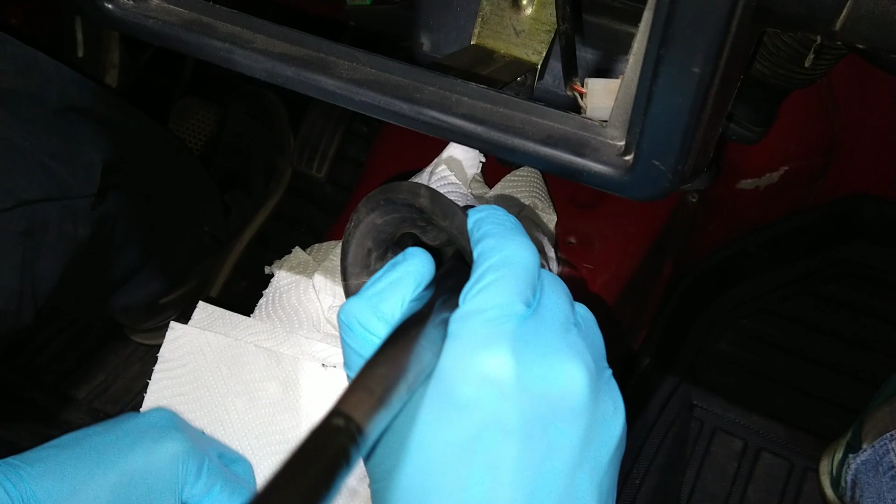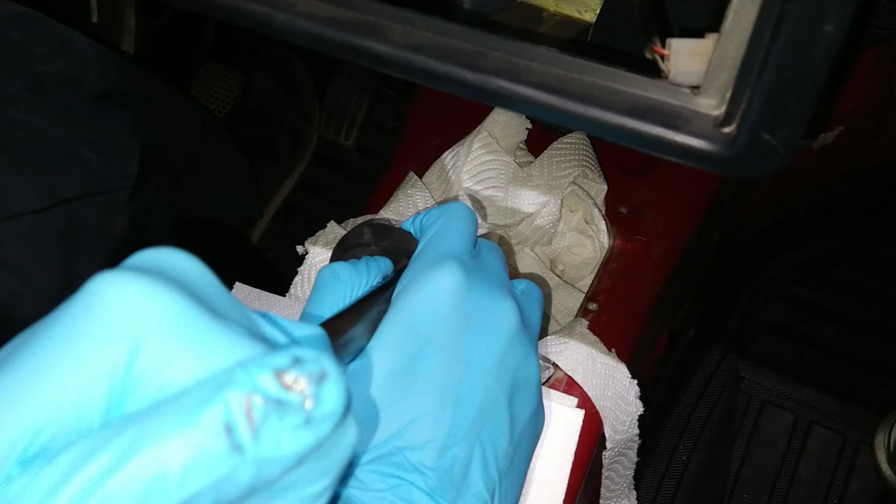This is shift, right? Okay, now it's incorrectly. Okay, what was wrong? So I shifted it, and the lever that goes to the forks down there fell out. Because we didn't tighten all the bolts. But because I knew in which gear it was, I just put the lever in that position and pushed it down, and we got lucky.

Come on, come on, you stupid greasy bolt. What an insult. It's not an insult, it's observation. If somebody is stupid and you tell them that they're stupid, is that an insult or is that an observation? Observation. Okay. And they cannot sue you for that.

Okay, so now let's tighten - let's try to tighten this bolt before shifting this time, because I really don't want to disassemble the top of the transmission.

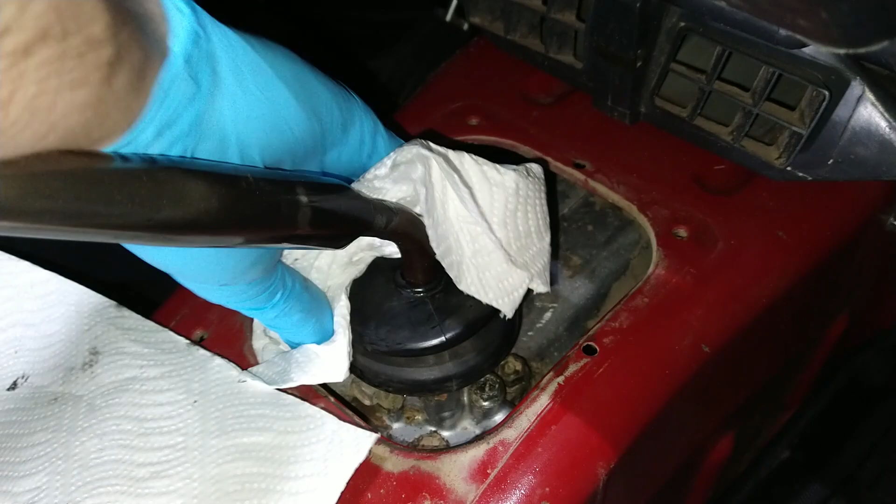And now let's put this boot over. That's it, okay, really clean this. I can wipe it down a bit. Nice, works?

So, first, second, third, fourth, fifth. And reverse - that is a lockup for reverse, so you cannot go to the reverse directly, because you cannot go from fifth to reverse. It has a lock. I get it, that's useful.

Yes, you need to go from fifth to neutral, then to reverse. You see how? Listen to how first, second, third, fourth - you see that, hear the click? Yes, that's the lock for reverse. Cool.

Yeah, Japanese thought about that, these bolts - Japaneering, Japan engineering. That is a great word, Japaneering. Oh, I like it so much.

These bolts are not ugly, but we'll put some new stainless steel ones while we are here. We have stainless steel bolts. I like these flanged head bolts, but we'll put a big washer and a stainless steel bolt. Let me just get them, since I just borrowed one from the pile of those bolts to get these bolts.

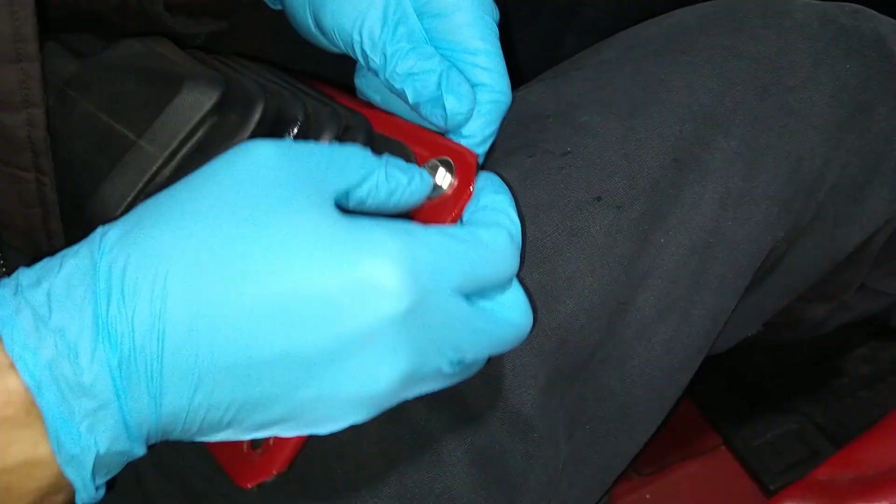Japaneering, love it. Is this still wet from the cleaning? Yes, I just rinsed it with brake clean to get all the grease and a bit of dirt off. Now this goes something like this.

I just realized it, I never owned a Japanese car before this, but I own Japanese cameras. Oh, you do? Canon is Japanese, yes, and I love it. Isn't Nikon Japanese? Yes, it is. So they are both Japanese. Oh, the techno music stopped. Oh, but now the noise of the bit. Fuji is Japanese. What camera is not Japanese? That's a good question. Olympus? Japanese. Really? I think it is. It just sucks. Oh, do I need to push it down to? Leica is not, that's Russian. I think. Okay, I need to push it down because it is angled.

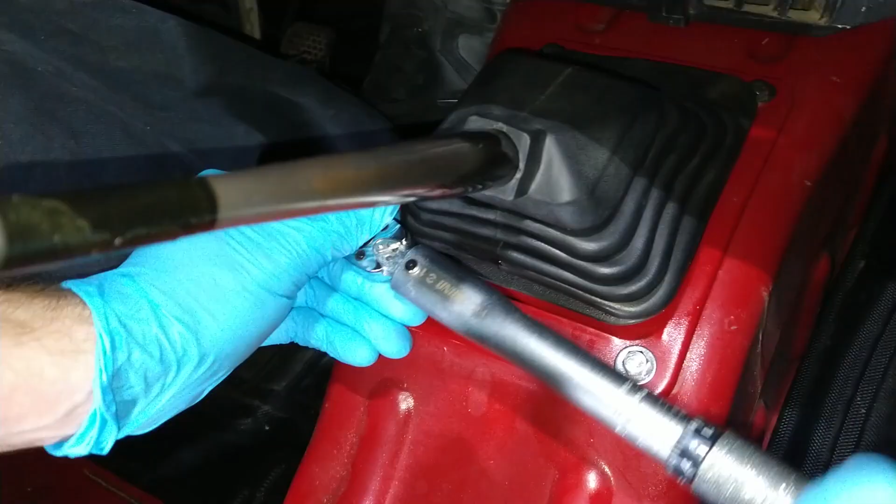Hello, tires. We are squeezing rubbers, so it is quite. It's a bit more than 8, but who cares? You should put studs. No, can I put studs here? Because this is curved.

Is Sony Japanese? Yes, okay, but they are a bastard company and we don't like them. Why? Yeah, they have some pretty bad decisions in their life. And Nintendo is Japanese, we also hate Nintendo, they're also bastards, bastards to their fan base. You like Pokemon? Not really. I used to love it.

Let's get this grease everywhere. Work it. Okay.

There we go, let's see. Okay, the car is tilted. I forgot about that. You were probably watching the artificial horizon on your screen here. Let it be, right? And I'm watching the two eyeballs, I guess.

So what are the 4 knobs? 1, 2, 3, 4. Is this some British humor? You like British humor.

Okay, that oil is changed. We need a baggie to label these bolts. And we should really change this oil. Oh, another oil to change. Yeah, but that is for another video, and maybe another day.

That sounds dry, actually. What? This thing, while it's running. I know, but I mean, I'm asking you. You're saying that it sounds dry while it's running. No, while you're shifting. See? This also. No, that sounds wet to you. Yeah.

Let's put the car back down on the ground and come back another day with the keys. But that's it, thank you for watching. Comment down below what do you think, does it sound dry or wet to you?